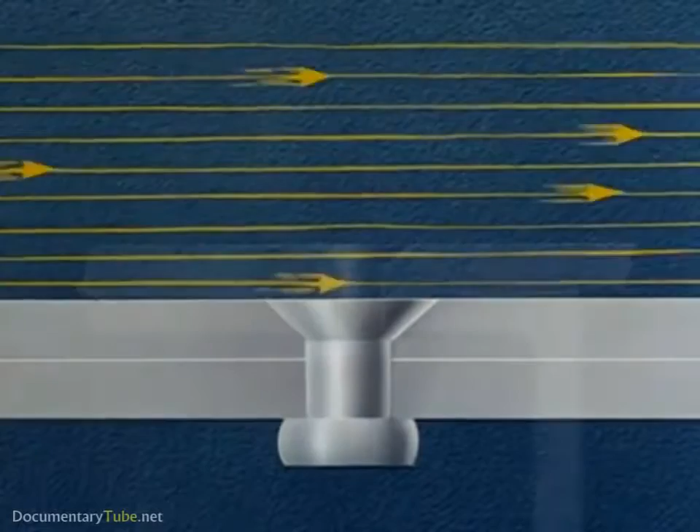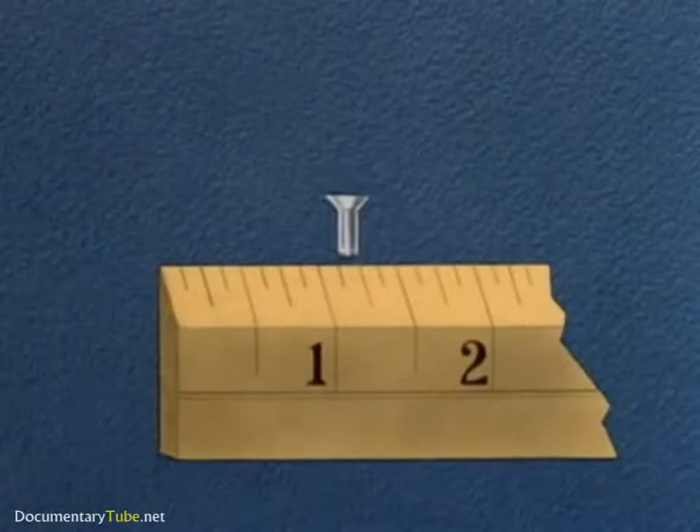The choice of method to be used in flush riveting is based on the thickness of the sheet next to the manufactured head. Let's assume we're driving a rivet 1/8 inch in diameter with a 100-degree countersunk head. Probably the best production method involves sheets of 40 thousandths thickness or greater.

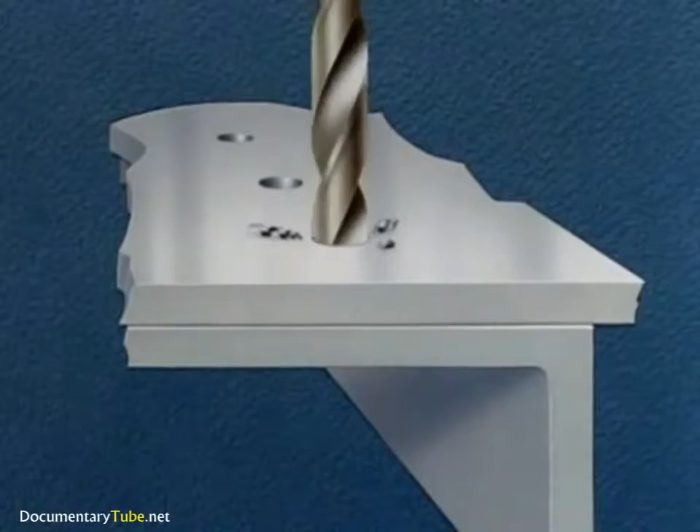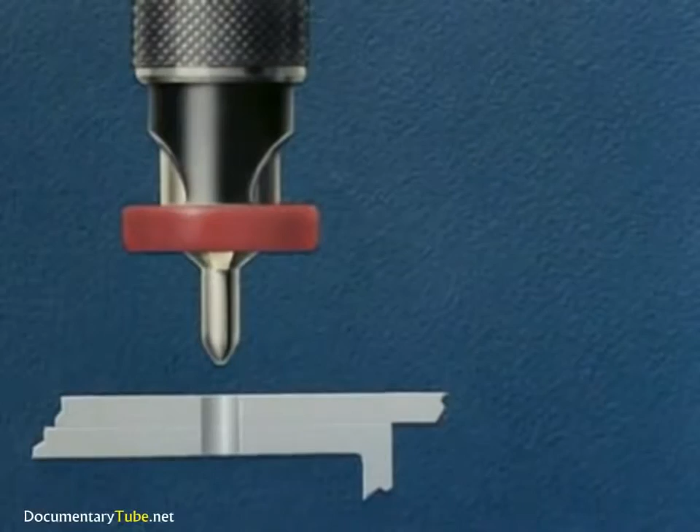We start with the assembly of the sheets, drilling the correct size hole for the given rivet. We're using a 1/8 inch rivet, so we drill a number 30 hole, then countersink, using a special countersinking tool with a 2-flute cutter and with a 100-degree cutting angle and number 30 pilot.

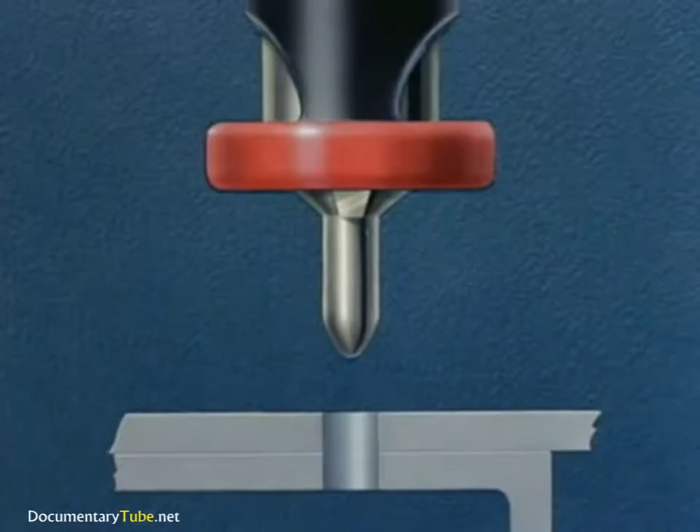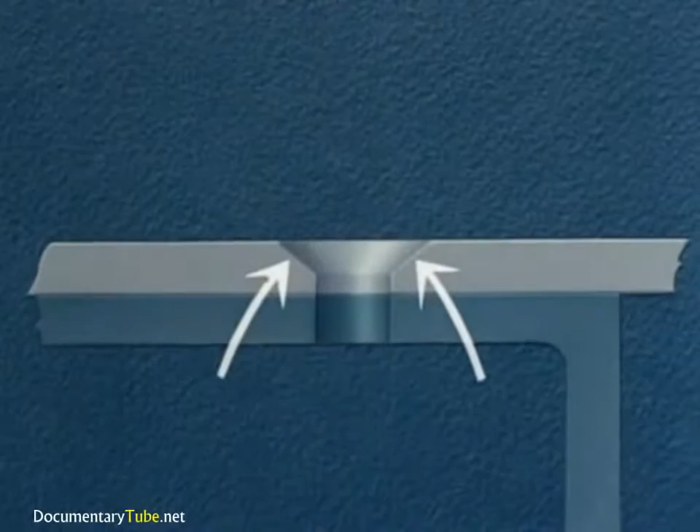Unless specific approval has been obtained from the stress engineer, the countersinking should not go through the first sheet. If sheets are properly clamped during countersinking, it is not necessary to disassemble them for deburring, which is a costly operation.

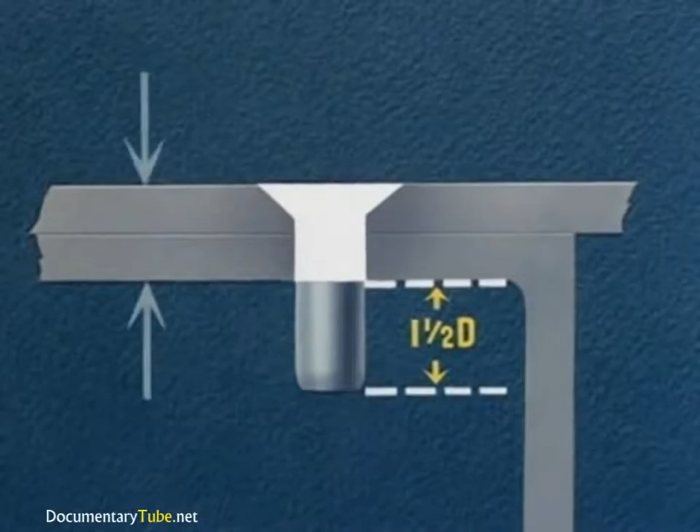Next, we insert the rivet, the length of which has been determined by adding 1 1/2 times the diameter of the rivet to the grip. The grip, as shown here in white, is equal to the total thickness of the material being riveted.

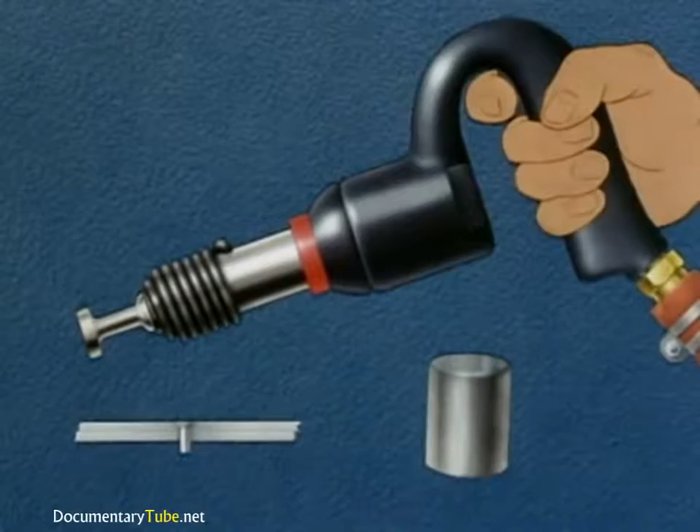A vibrating type air gun with a flush rivet set and a regular bucking bar may be used. Ordinary riveting technique will do for driving of this type rivet.

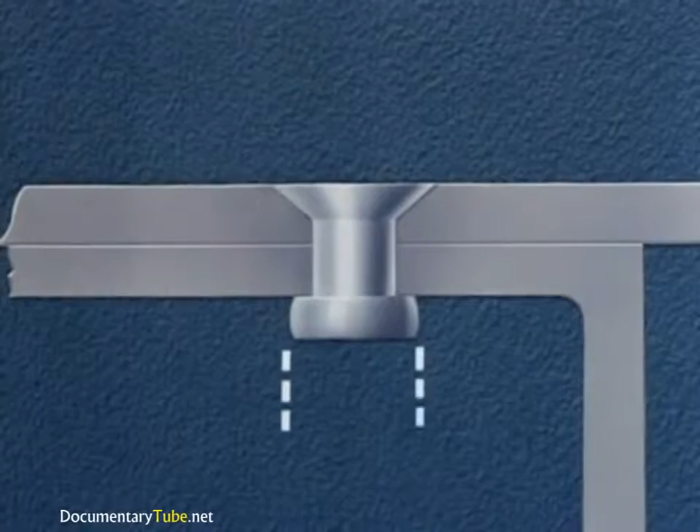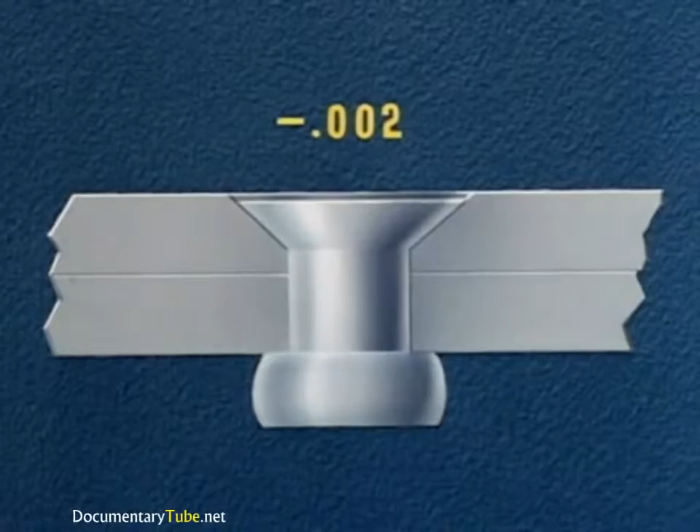The finished rivet should have a formed head, 1 1/2 times the diameter of the rivet and about 1/2 the diameter high. The flushness of the rivet, as determined by aerodynamics, must run in the neighborhood of plus or minus 2 thousandths. We have just demonstrated the countersink method of riveting.

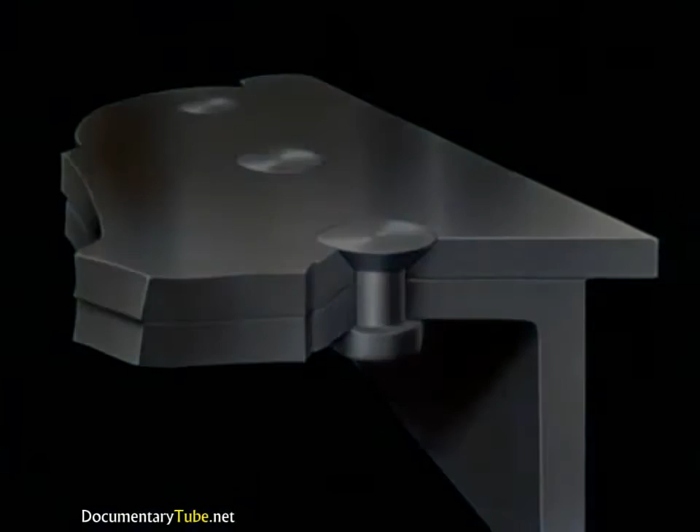This is a method used when both sheets are over 40 thousandths in thickness. Structural requirements make it necessary to dimple the sheet next to the manufactured head if this sheet is under 40 thousandths in thickness. This double dimple method is used for flush riveting thin sheets.

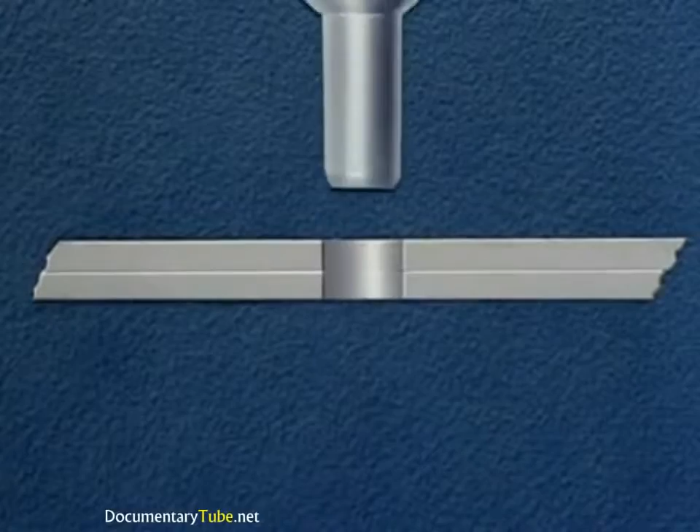Here again, we start with the number 30 hole and follow this with insertion of the rivet. The length of the rivet is again the thickness of the material plus 1 1/2 times the rivet's diameter. The driver uses a standard flush rivet set.

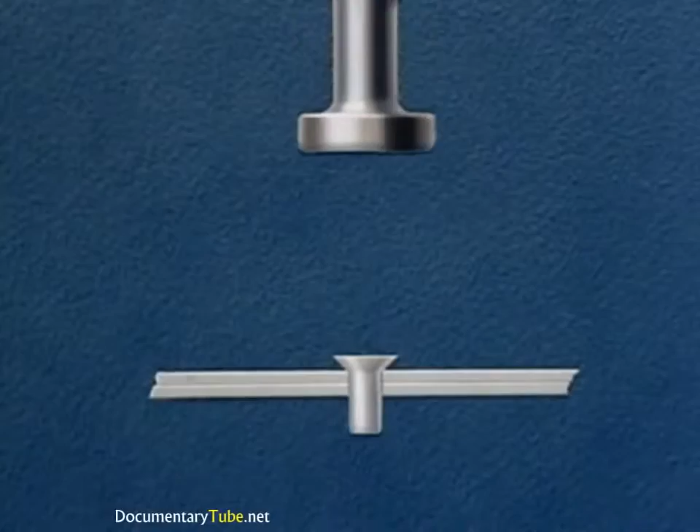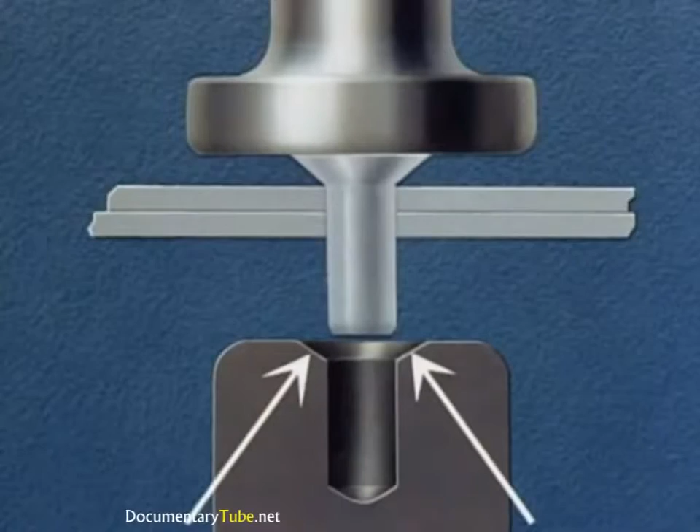The bucker uses a special dimpling set that has been adjusted by the tool department to give the correct angle and depth of the dimple. Using the rivet as a punch, we dimple the two sheets together into the dimpling set. The special dimpling set is removed.

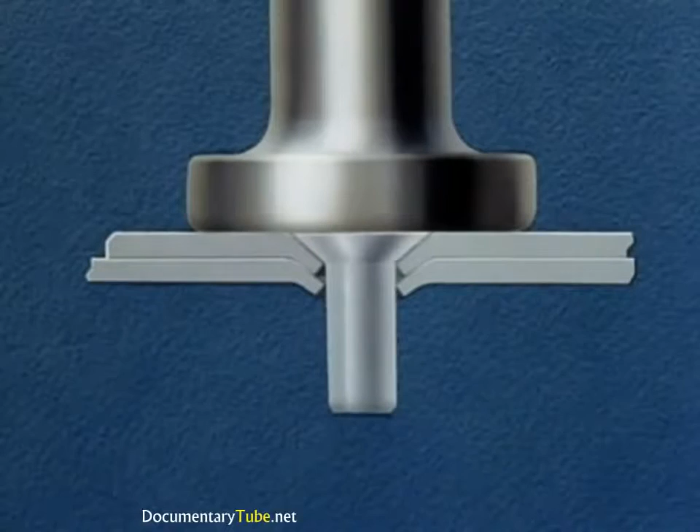The driver retains the standard flush driving set. The work then proceeds with the bucker using an ordinary bucking bar. Driving this type of rivet requires greater skill than was required in the previous method.

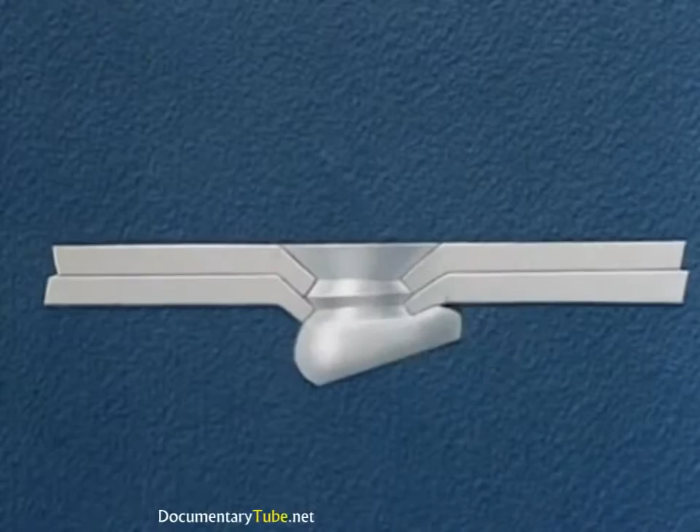Any clinching or offset of the rivet will cause the dimpled edge to crack. The rivet must be driven straight. We have just shown the double dimple method of riveting. This is one of the methods used when both sheets total 40 thousandths or less in thickness.

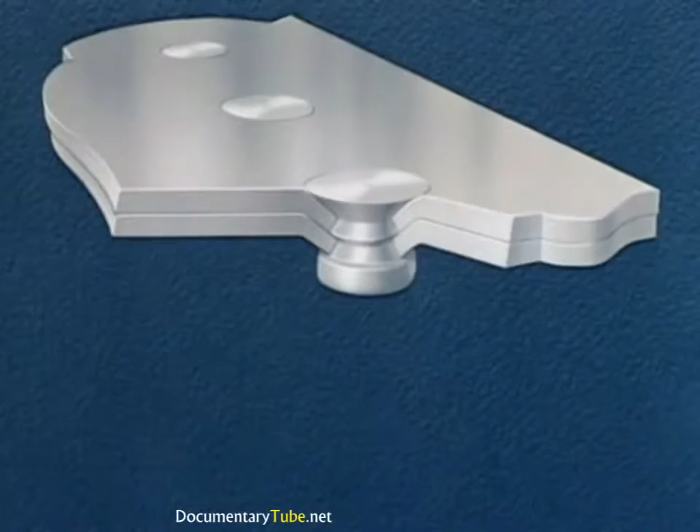A third method, used for riveting of slightly heavier gauges than in the last method, involves a separate dimpling of the sheets. Again, we start by drilling our number 30 hole. The sheets are then disassembled and machine dimpled separately on the squeezer.

Note the angle of the dimpling tools. The dimpling punch for the top sheet has an angle of 100 degrees, the same as the rivet head. The dimpling die has an angle of 110 degrees.

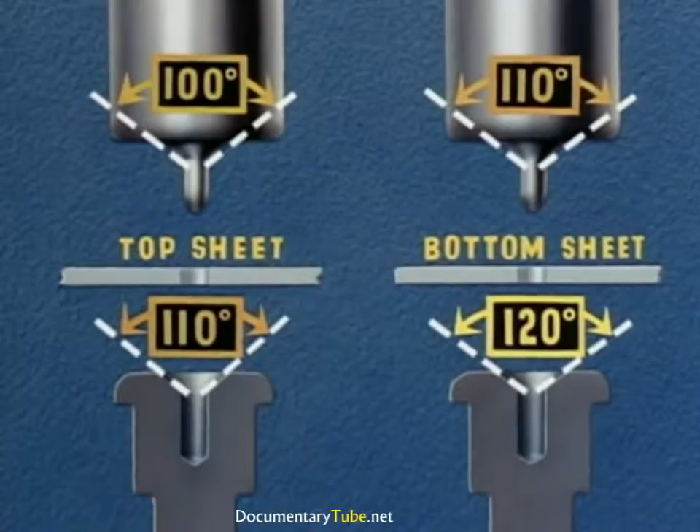The dimpling punch for the bottom sheet is also 110 degrees to correspond with the top sheet, and the dimpling die is 120 degrees. This difference is necessary in order to get a good nesting of parts. Upon completion of the dimpling operation, the parts are reassembled.

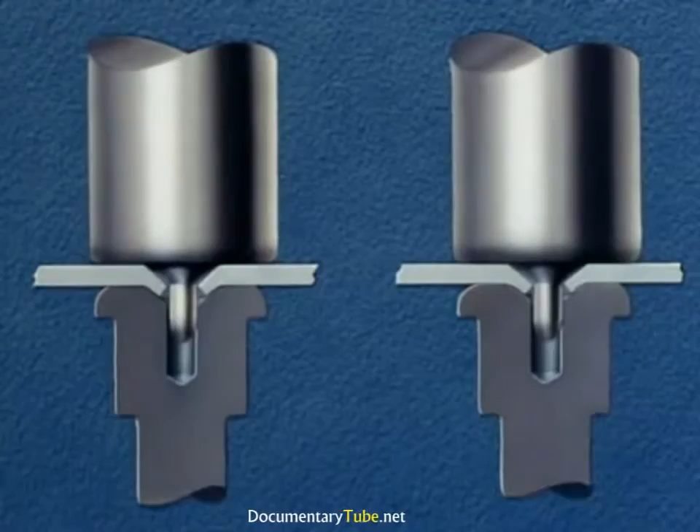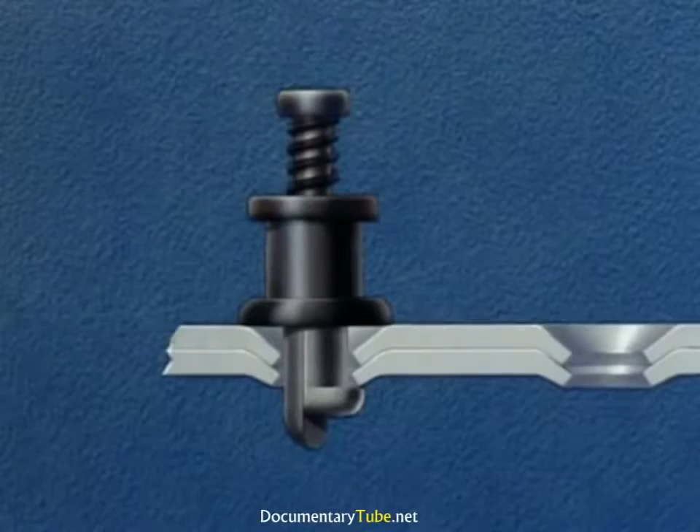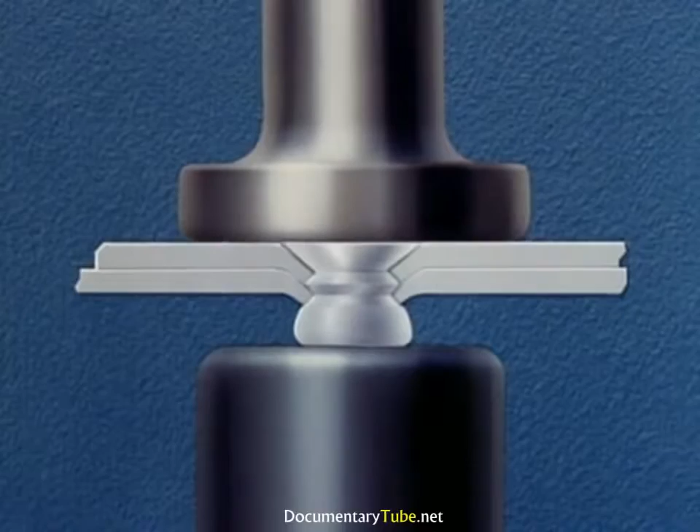Sheet metal riveting clamps are used to hold the parts together until riveting is completed. The rivet is inserted, and from here on the work proceeds using a regular flush riveting set and the ordinary bucking bar. Driving this type of rivet requires the same skill on the part of the operator as in the former dimpled method. It is very important that the rivet be driven straight.

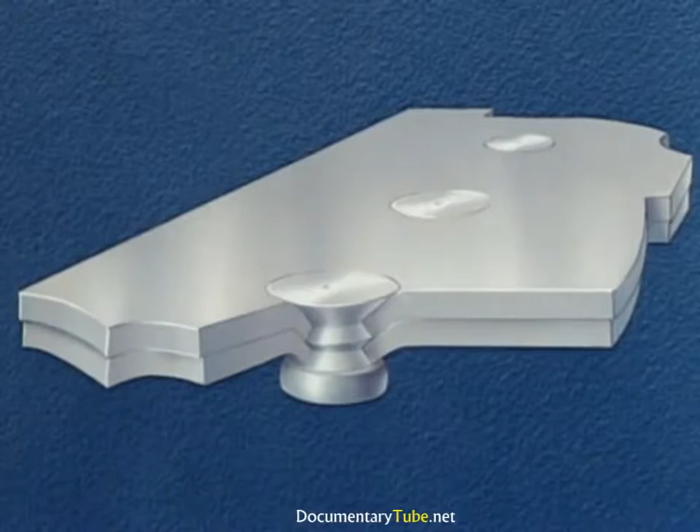We have just illustrated the pre-dimple method of riveting. The sheets were taken apart and machine dimpled separately on the squeezer. This is a method used when the sheets are too heavy for the double dimple process.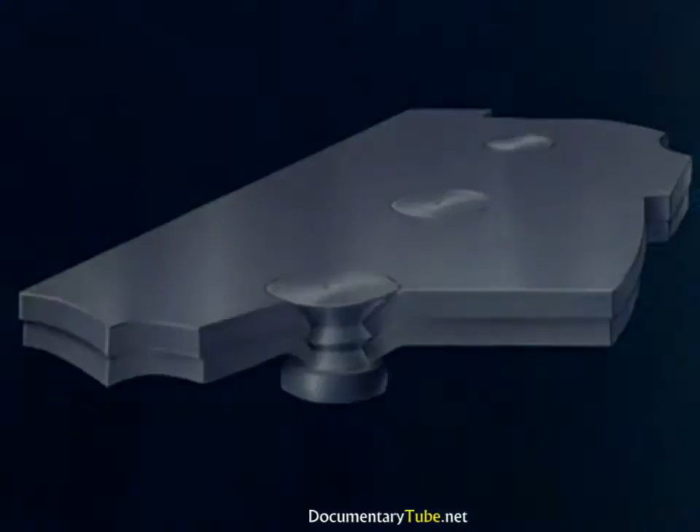For sheet gauges where the top sheet is too thin to countersink and the bottom sheet too thick to dimple, we must use a combination of pre-dimpling and countersinking. The top sheet, being under 40 thousandths, must be dimpled. The bottom sheet, being over 40 thousandths, will be countersunk.

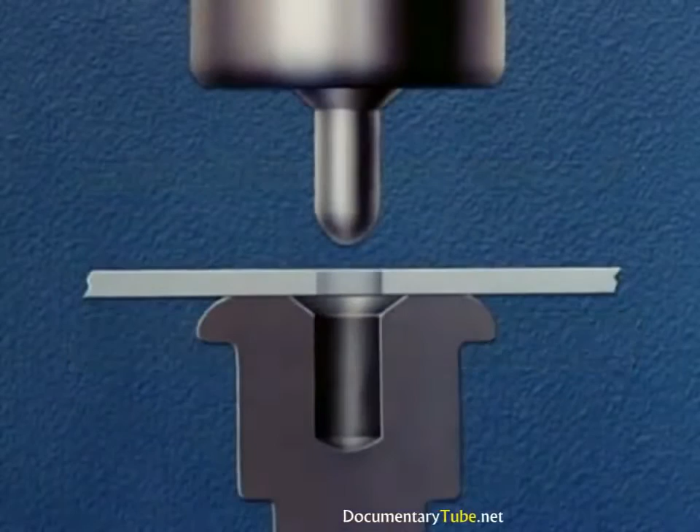Again, we start by drilling a number 30 hole. Sheets are disassembled and the upper sheet is machine dimpled using special dimpling tools on a squeezer-type machine. The bottom sheet is countersunk using the special countersinking tool.

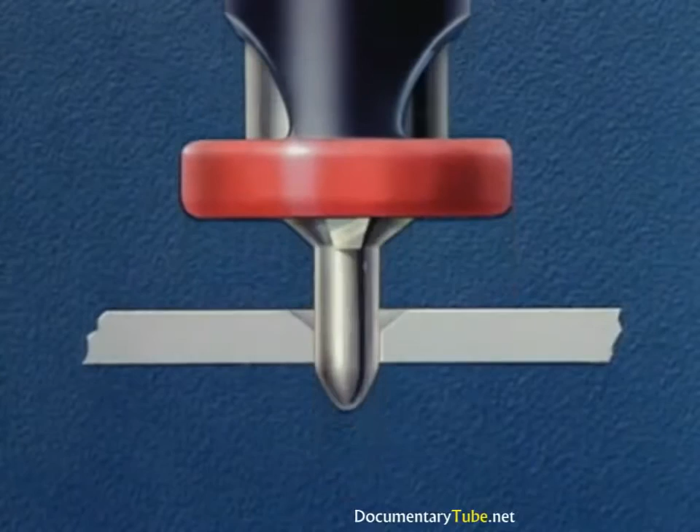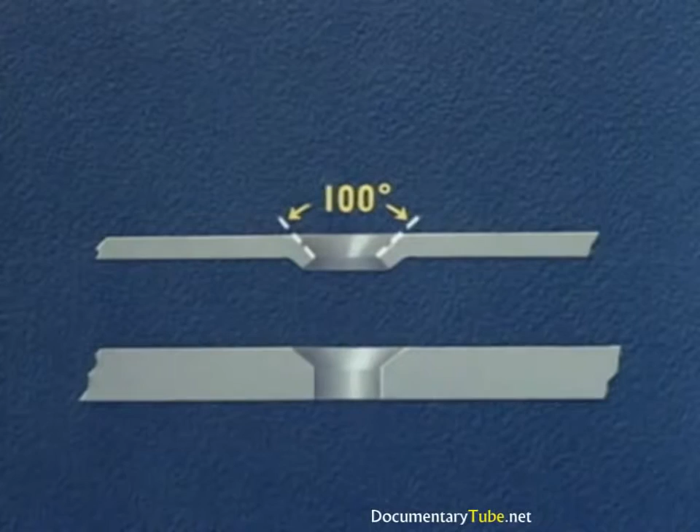The angles of the dimple and countersink are very important. The angle of the dimple next to the rivet must be 100 degrees because the rivet head is 100 degrees. The angle on the opposite side of the sheet is 110 degrees. The angle of the countersink is also 110 degrees.

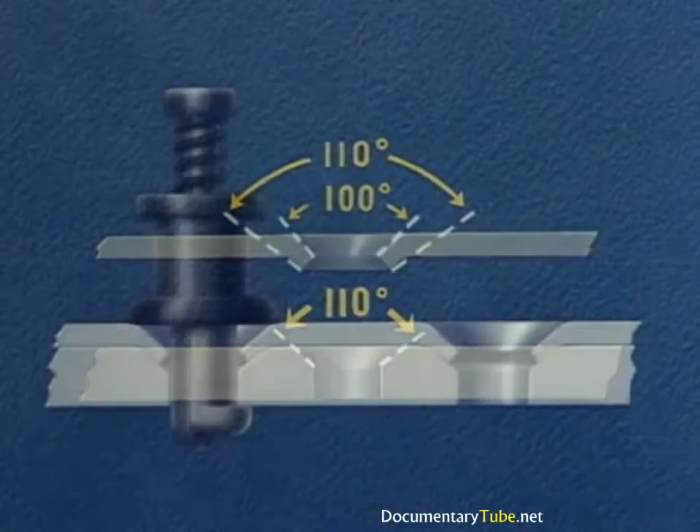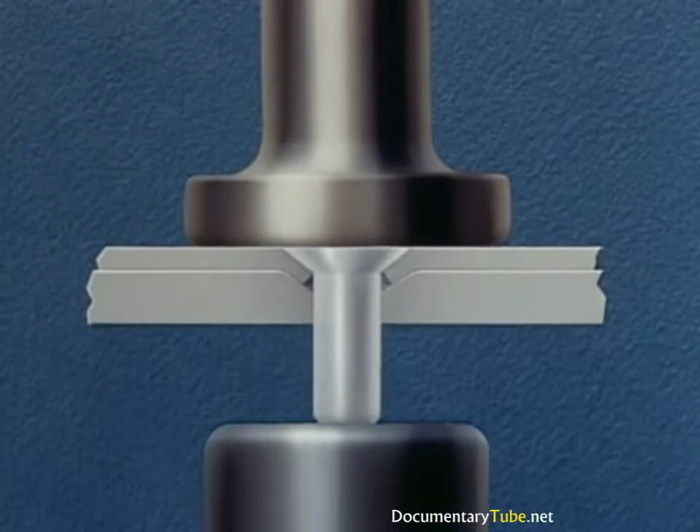Parts are reassembled using sheet metal clamps. Rivet is inserted. This is followed by driving the rivet using a standard flush driving set and bucking bar. This riveting technique is fairly simple because there is no lip on the under sheet to cause cracking or failure from clincher rivets.

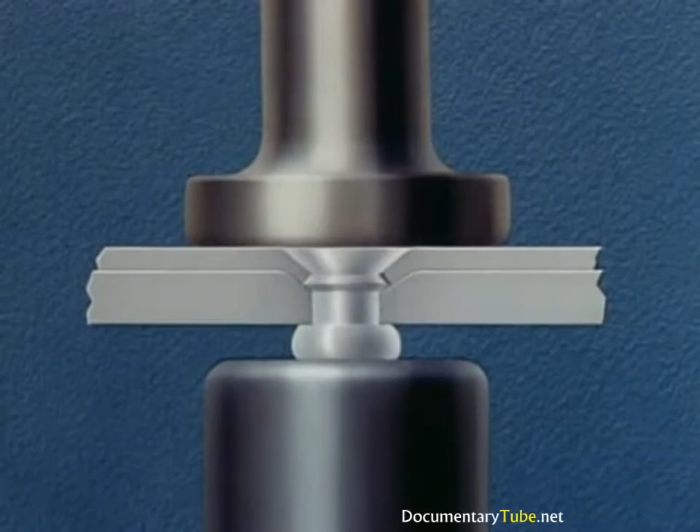We have just demonstrated the combined countersink and dimple method of flush riveting. This combination is used in cases where the sheet next to the rivet's manufactured head is too thin to be countersunk and the bottom sheet is too thick to be dimpled.

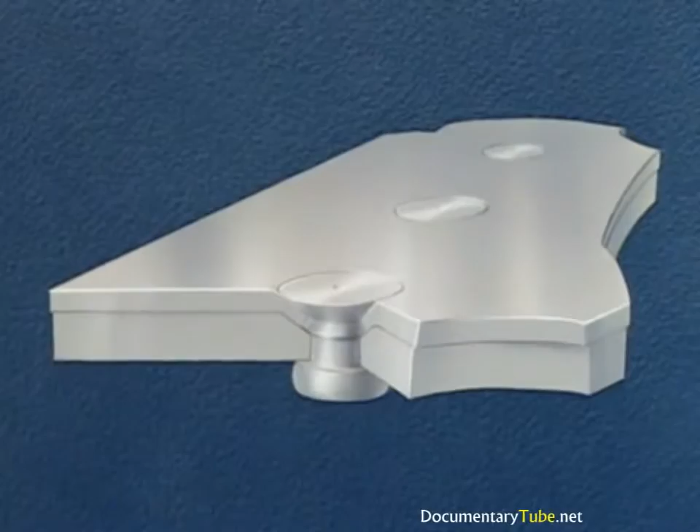Now let's review the four methods of flush riveting just demonstrated. Countersinking, used when the top sheet is 40 thousandths thickness or greater. The flushness of the rivet is obtained by setting it into a hole countersunk by a special tool.

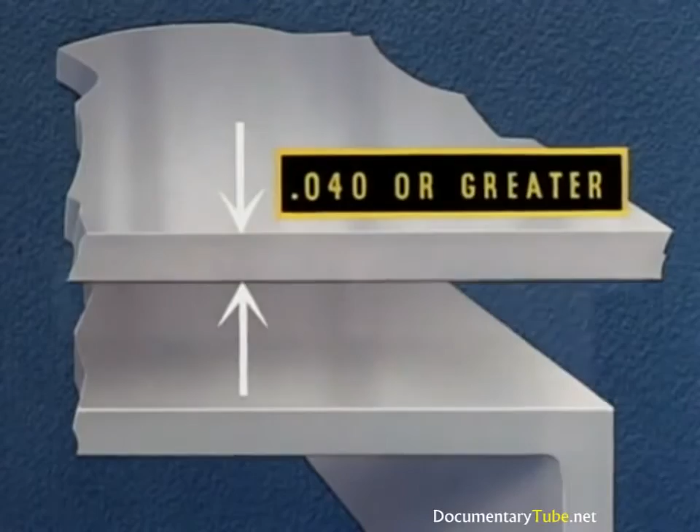Double dimpling, used when the total thickness of the sheets being riveted is 40 thousandths or less. In this method, the flushness of the rivet is obtained by using the rivet itself as the punch to form the dimple.

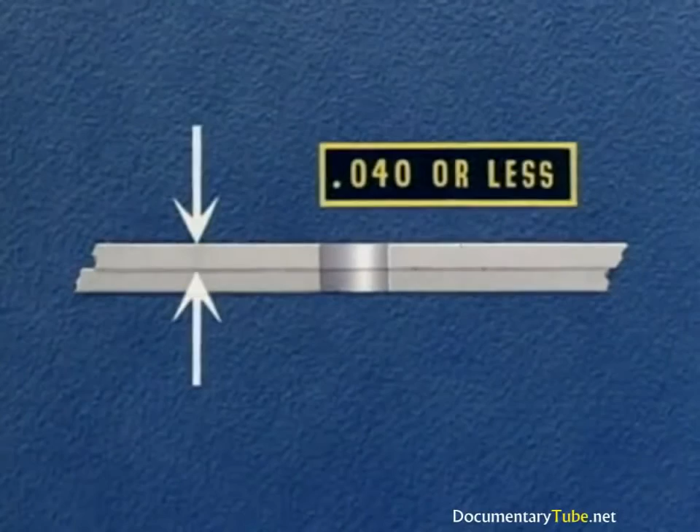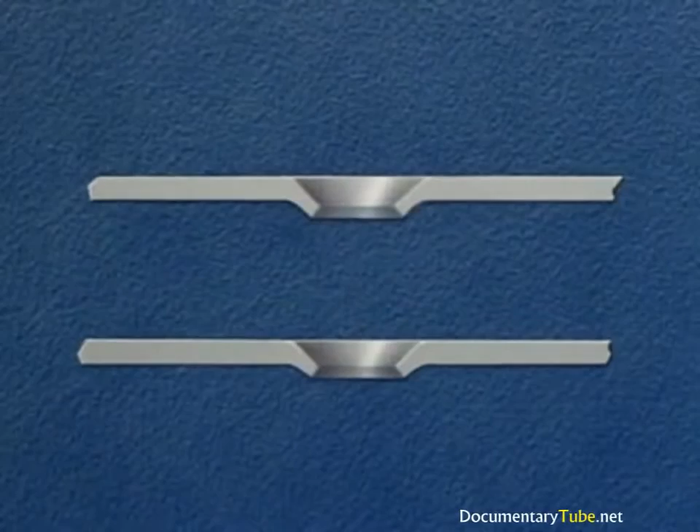Pre-dimpling, used when the top sheet is 40 thousandths or less, and the total thickness of both sheets is over 40 thousandths and under 90 thousandths. The flushness of the rivet is obtained by setting it into a dimple formed mechanically on a squeezer.

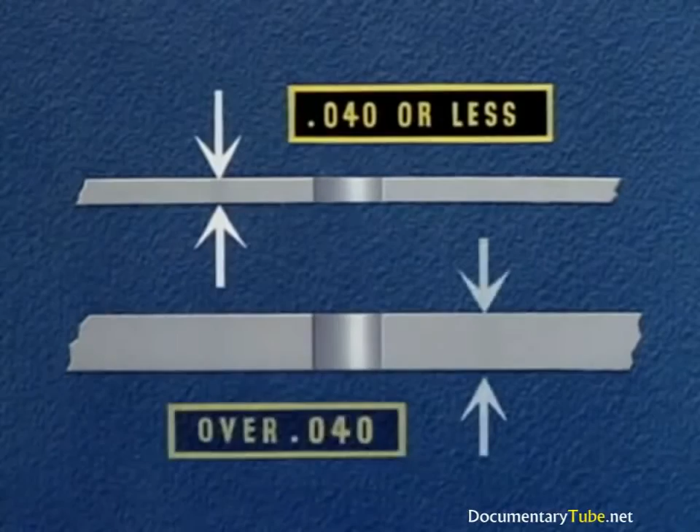Combination countersinking and dimpling, used when the top sheet is too thin to countersink and the bottom sheet is too thick to dimple. The top sheet is dimpled and the bottom sheet is countersunk. The result obtained by each of these different methods is the same: the head of the rivet is flush with the surface so that the turbulence or drag is held to a minimum.

With the ever-increasing demand for greater speeds in aircraft, it has been necessary to remove every possible projection from the outer surface of the airplane. Everything that would induce turbulence with its attendant drag must be reduced to a minimum. The use of a rivet whose head is flush with the surface being riveted eliminates the drag of the ordinary rivet head and thus aids in a...